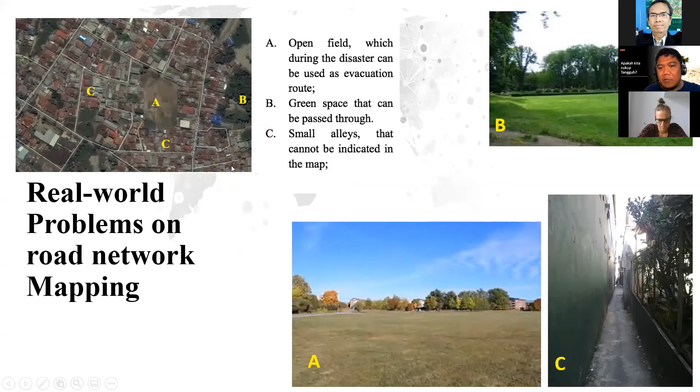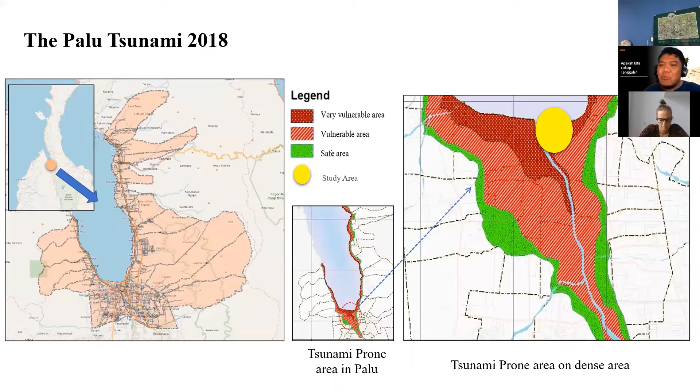What I want to show you is that when we use the Google map I already showed you, if we use only a model like that to predict how many minutes people can transfer from their place to the nearest evacuation shelter, it's almost impossible to predict very well since the data is not enough. We have existing road data that is very low because of the scale itself.

The evacuation route should also be considered at meso or even micro scale, because even at the meso scale, they already ask the planner about planning the urban area evacuation route. They already asked, but again the data will not cover enough.

Virtual network should mimic. My idea is I want to introduce a virtual network that can predict the route, and from that we can predict how many hours or minutes they can go safely to the temporary evacuation shelter.

The majority of the current network analysis models, like Google, still rely on existing network maps. I want to tackle this problem using tessellation virtual road network. What is tessellation virtual network?

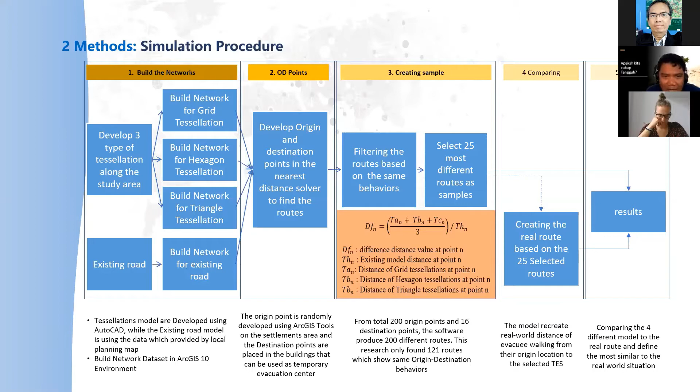And then I introduced one method using only the existing road network, grid method, hexagon tessellation, and triangle, and then I compare this. I applied it in the study area.

I use 20 meter radius in the circumscribed circles because the average parcel length is 20 meters.

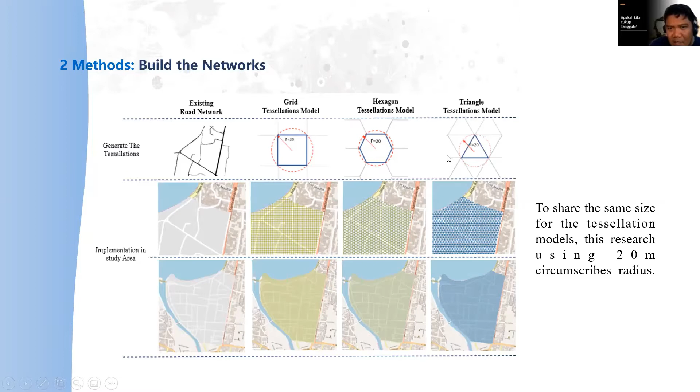This is the result of the OD, origin as red triangle, destination as blue circle, and this shows the 16 buildings that I think will have a strong structure during the earthquake.

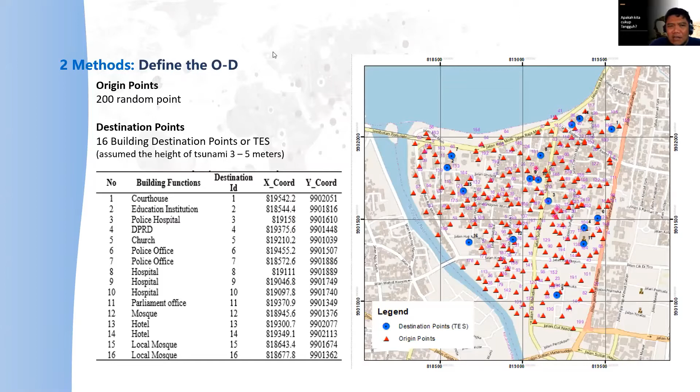Because 200 routes is already too much, I only selected the 25 most different routes as samples to drill into what happened in the model. Out of 25 routes, only 4 times was the existing model, like Google, very close to reality compared to the tessellation model as a virtual route. The other routes were mostly similar to the tessellation I proposed.

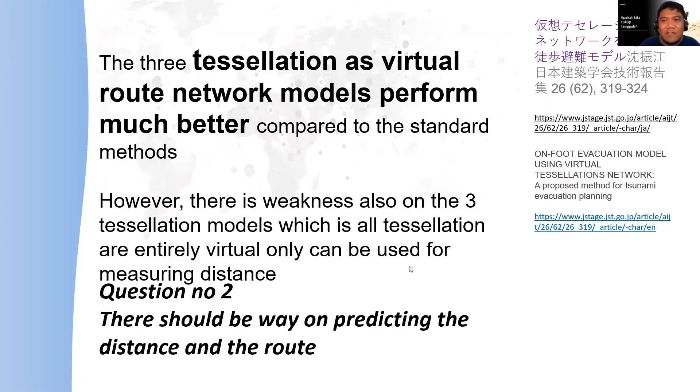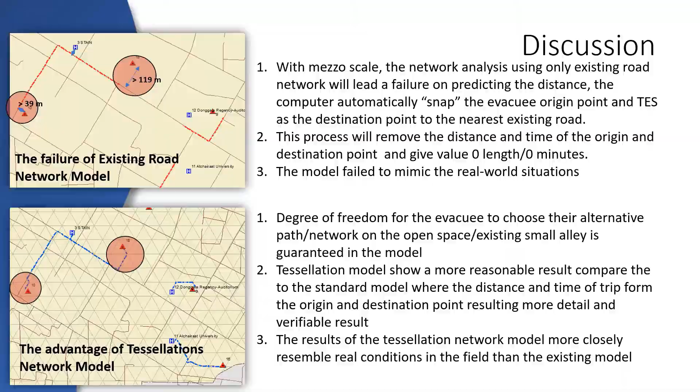What actually happened? Why is the result of the tessellation much better than the result of the standard model? I will explain later. So this is the second question: what if I combine the hexagon tessellation compared with the standard model that Google uses?

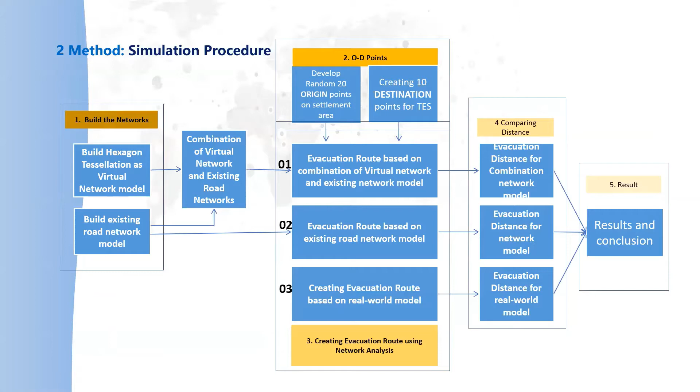This is the procedure. I again prepare the network data. This one uses only the existing road model as one model. This one is the tessellation model combined with the existing road, as the second model. And of course the real world model - I want to compare all 3 of them.

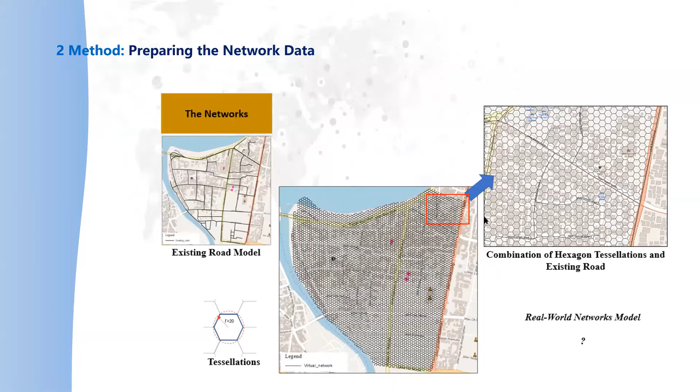This is the result, the OD. From the previous model, at this time I only use 15 destination points as TES, and 20 origin, evacuation origin points. Then what happened is, using the existing road network model, this is the distance in meters that we can count.

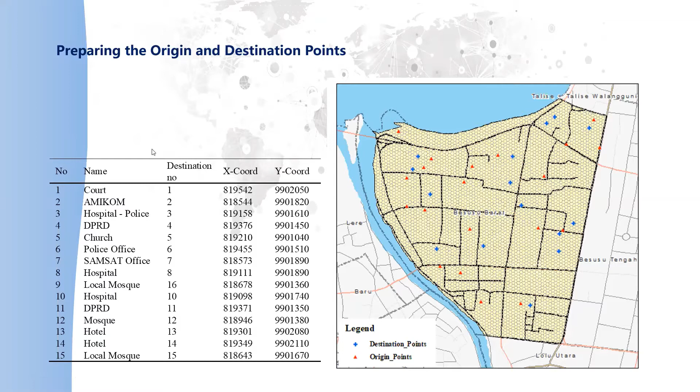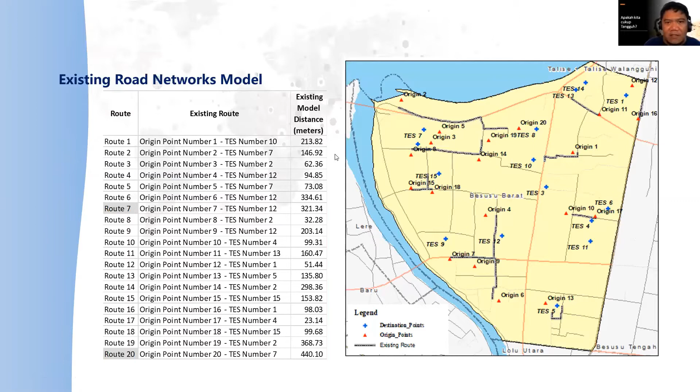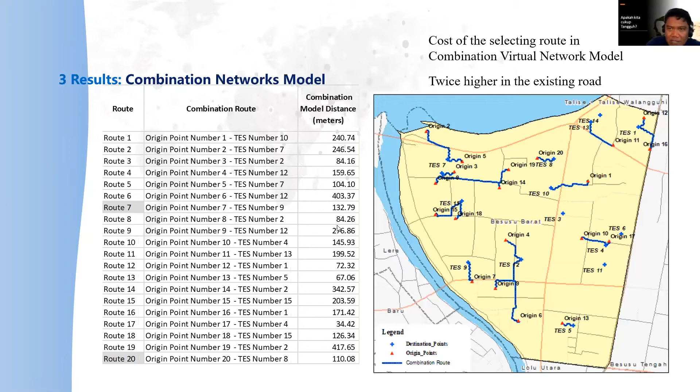Route 1, route 2, route 3, route 4 until route 20 - we can see the result using only the existing road model. Using the combination I propose, we also have the result. And then the real world, what happened in the field, is actually like this. So I can compare this result, and I think it's quite good.

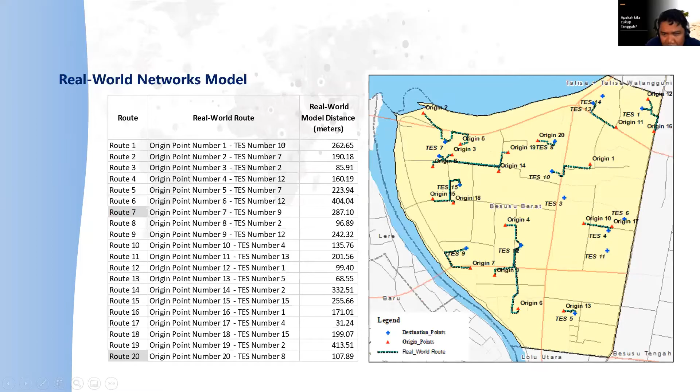Out of 20 routes, what I found is only route 7 and route 20 show very different results.

For example, in route 20, the origin of the person here - in the Google model, it asks the person to jump to this route and go here, to the front of TES 7, then jump to the building. While my model is exactly the same as the real world result. But other than that, I also have a problem here - my model has to cross this building and then go to TES 9, while the real thing they should do is actually use this path.

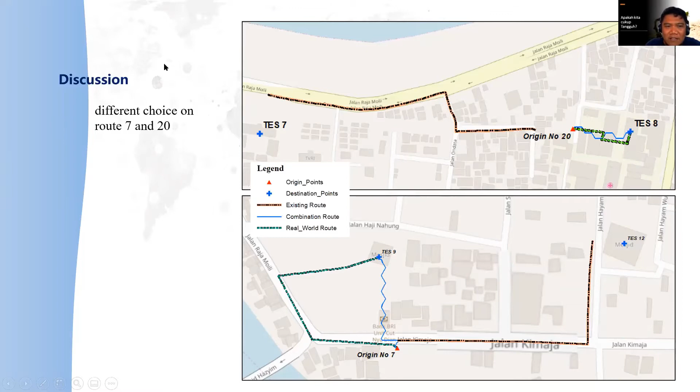Overall, from all 20 routes, only route 7 shows the weakness of this method. So out of 20, only 1 shows the weakness - 19 routes show results much closer to the real world condition. It means 95% of my results show that my proposed model can be accepted.

This research concludes that the combination virtual network model produces a better result. Another thing to consider is evacuation planning, the distribution of TS to serve the maximum area within 5 minutes. So planning the TS is also challenging.

But in the future, I will answer this. Actually, we already did something on how to determine the location of TS, but it's still in process. I hope at the end of this year or next year we will produce another journal based on this finding.

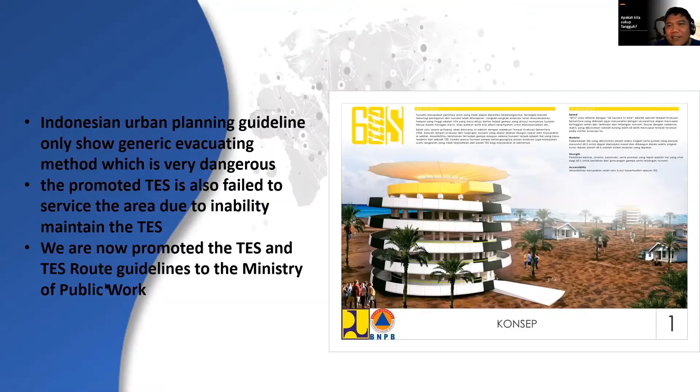Thank you, Pak Rifai, for your very interesting presentation related to our hazard areas in Indonesia. Now I'd like to give time for the audience to ask questions. You can ask in Bahasa or in English, that's okay.

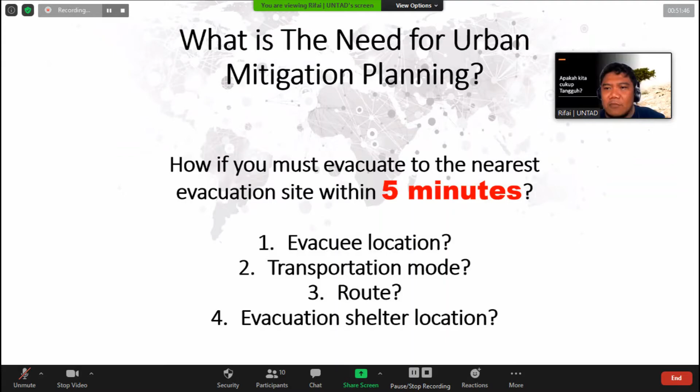Oke, mantap. Itu satu tantangan bagi planner dalam membangun, mengintegrasikan antara infrastruktur, fasilitas umum, dengan antisipasi kebencanaan. Jadi kalau misalkan gedung yang dibangun walaupun bagus, tapi kemudian tidak bisa digunakan pada saat diperlukan, itu juga sia-sia. Dan ini adalah masalah nyawa orang, dan jumlahnya besar, itu yang sangat mengerikan.

Ada pertanyaan lagi dari teman-teman yang hadir? Silakan. Saya tadi melihat ada pendekatan baru, tapi untuk base map tadi, maksudnya base map itu apa? Base map yang sudah kita punya, misalkan dari BIG atau pakai base map internasional, itu kan sudah ada perbedaan ya. Gimana tuh kira-kira Pak Rifai?